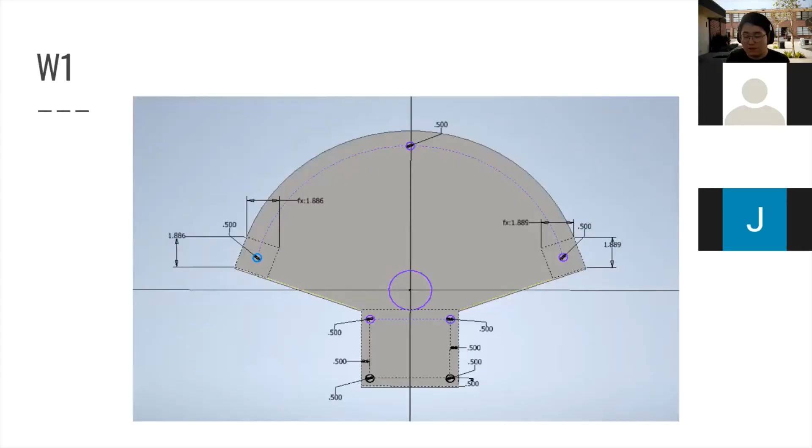So if you're wondering what this is, it's just going to be holes cut in, kind of like skeletonized, basically the structure. Now these ones cost me quite a lot of time to CAD, but these are stoppers.

This was a specific request from one of our other doctors who specifically wanted to say that some patients, their hand wants to be locked in at a place. Like right now, our device can move the wrist like that, but some doctors want it where it can go to this position and stay there for like 30 seconds or maybe a minute, however long the patient needs. So that's kind of like a stopping mechanism.

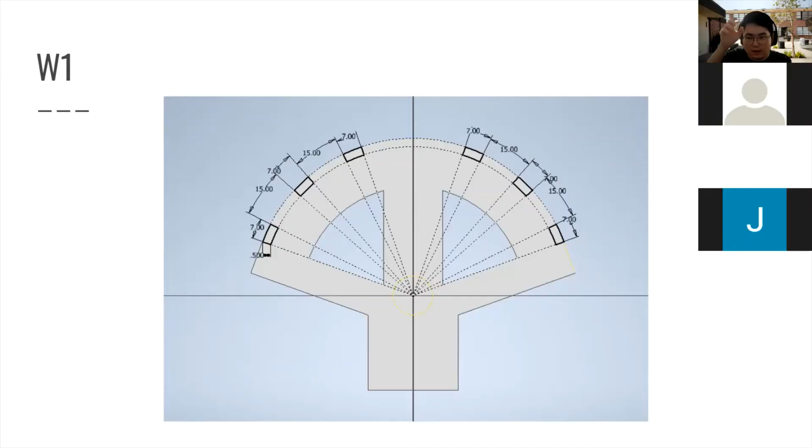And when I contacted Leaders Rehab Robots, they said they're going to come up with like a little dial, as to say, that goes with regulations. So you don't have to worry about the mechanism that puts it into place, but you will have to CAD little holes outside. So as I showed you before, this is going to be the final model/revision for wrist 1. Do any of you guys have any questions with wrist 1?

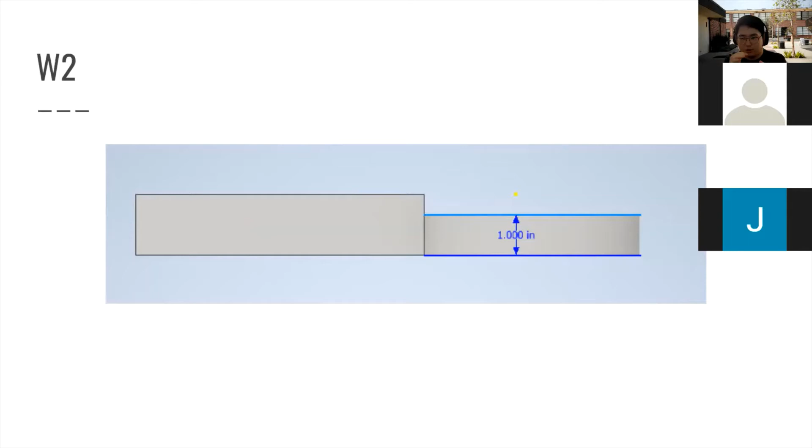Wrist 2, you just have to reduce it by 1 inch. Again, with the whole being efficient, our mentors don't need all that space, so we're just going to shift it up by 1 inch. No big deal, just get it done quickly.

Wrist 4, Michael. We might have to get rid of the whole adjustable settings because our mentor said that's too much space that we need. Like if we make it adjustable, it'll be too wide and it's going to be hard for transportation. So you just have to cut off the little parts there. No need.

I also put specific measurements for how it should be. You see those on the annotated blueprint, I put measurements and everything. So right now the dimensions for the overall plate is fine, but we do have to remove the adjustable factor because it's kind of like a balance between feature and weight.

They don't need all that space in the first place, and they don't really want the patients to have to fiddle with it, because if the patient is unable to secure it properly, then it might be a problem, and we can't always expect them to adjust it properly.

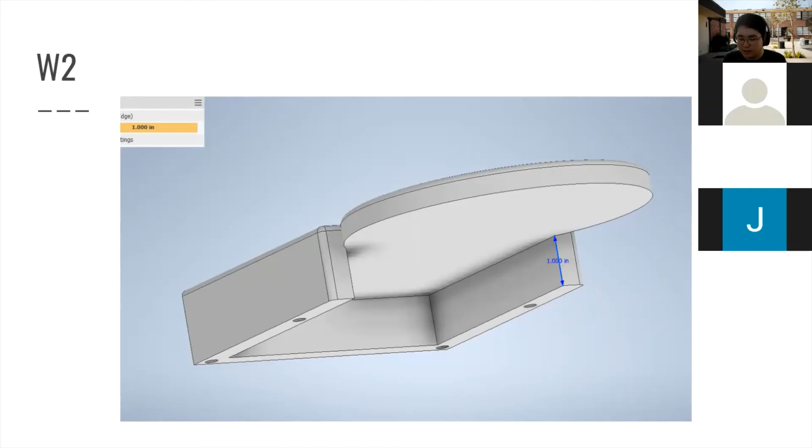Our mentors actually proposed that we keep the friction pad or something like that, the one made out of rubber. They're going to coat the entire thing with it. Each part where it makes contact with the arm, they're going to coat it entirely in this black layer, kind of rubbery, like the stuff you find on workout benches.

Alright, so F1. Now I'll let you guys know what's happening with F1.

F1 has always been a little bit of trouble because that's the part where Dr. Kova gave us a suggestion, and she was focused on F1 as well, thinking, if a patient's hand is shut closed, how is he going to apply the device? How is he going to put his hand in it so it fits? So what I did was give it a pointy shape.

This is just some liquid container, but basically, if a patient's hand is shut, because there's a wedge over here, the patient's hand can basically slide right in like that. You guys kind of get what I'm trying to say?

Here's just a canned soda. The patient really can't grasp onto it if he can't open his hand. He needs to open it. So what we're going to do is have a little rounded edge that acts as a wedge for the actual fingers to open. Just kind of letting you know.

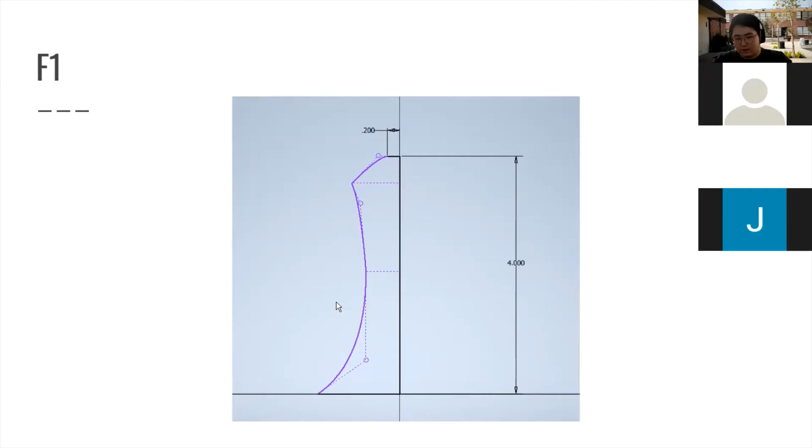And of course, we can't make it too bulky. So this is a more comfortable shape that I thought of, where you can just grab onto it and it'll be a little bit easier to use.

There's a specific part in your wrist that doesn't exactly work. It's one of the complicated parts of our wrist, especially because our wrist is a very complicated anatomical structure. This is one of the things Dr. Kova recommended, where it needs to be a little bit slanted because it's easier for them to grasp it. It's hard to explain because I don't have the exact medical knowledge to know which bone or joint is causing this.

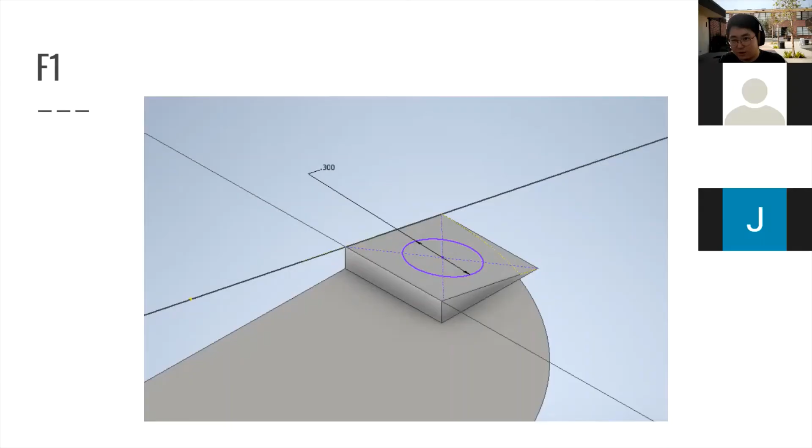But this was just a recommendation from a medical professional, that it's a little bit more comfortable to patients to have it slanted. So this little slant is basically accounting for that. We're going to drill a hole in there, there's going to be a rod, and it's just going to be a slanted surface.

And with F1, I kind of got rid of the pin because we didn't have enough space. I don't know if you guys know this, but that's 0.3 inches, if you have your ruler with you. That's actually very short, and we don't want our mentors to drill holes that are surgically small, because then it's going to halt production, and we exactly don't want that.

So just know that we're going to have to take into account actual real life variables, because here's the thing: again, our mentor is actually going to help us build this thing. It's actually going to be 100% built within a couple of months, and a patient who volunteered and a doctor who volunteered may actually use it or try it once or twice.

Back then, when we were 3D modeling, we could make all sorts of holes, all sorts of measurements, all sorts of things. But right now, we need to account for the realistic structure of our 3D models, especially like this hole over here. We could make an entire hole and a pin and make it 0.1 inches, but if you guys have a ruler with you, 0.1 inches is like not even the size of my fingernail. It's very, very small, like a surgically small measurement.

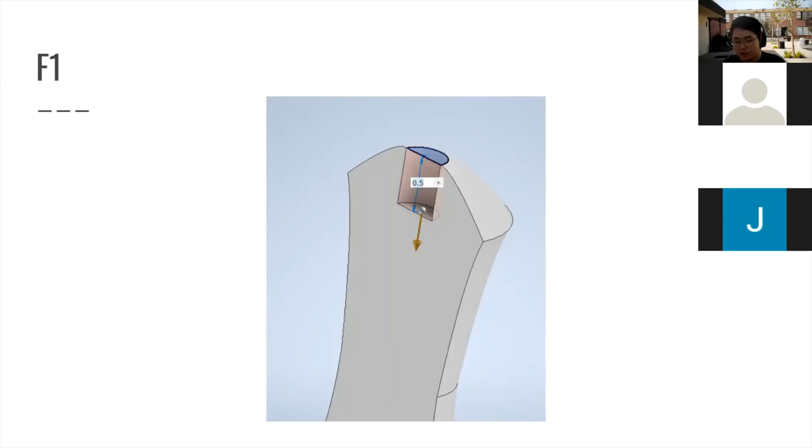So this is what it's going to look like. I know it looks very weird, but essentially, patients are going to have to use the wedge as a way to open it, and they're going to grasp onto it. Now this design can be so malleable. It really doesn't matter at the end of the day.

Let's say we're unsatisfied with this design, well all you can do is just 3D print or maybe get some plastic and make this a little bit thicker than it has to. Or you could try foam padding or silicone padding. It's really simple. So for F1, I'm going to assign someone to specifically edit it.

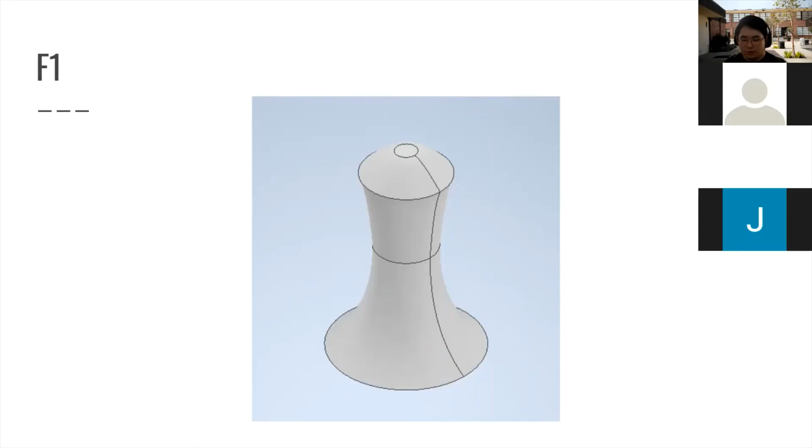So whoever is going to tackle that challenge, please don't think you have to do everything precisely, especially F1. It's such a volatile piece that can change, so don't worry too much about that.

Now for F3, before I go to F3, I got to make a quick announcement. F2 was scrapped. Our mentors didn't like it at all. They said it's a little too complicated, and the mentors are going to take care of the safety mechanisms themselves, so don't worry too much about it.

They don't want high school kids to focus on what's safe and what's not safe, because at the end of the day, we really don't have an educational basis on medical safety and things like that. So they said don't worry about it, we got that covered. So for F2, we're not going to do it because it was strictly a piece meant on keeping the hand from falling, but they have a different idea.

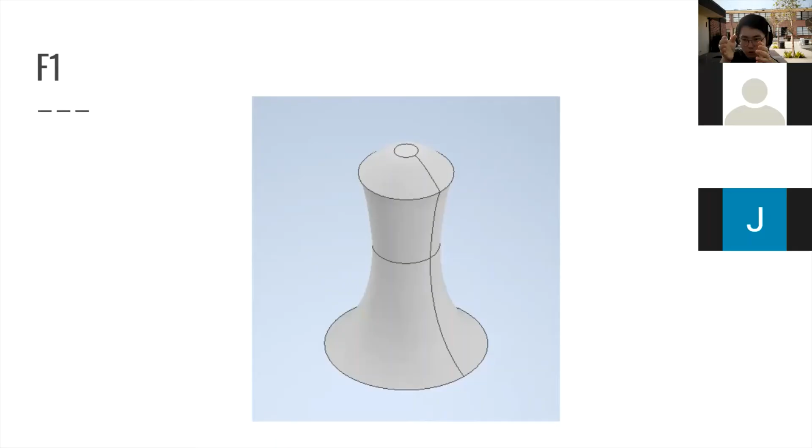They're thinking of putting pads just connected to F1, so they'll probably connect something to this base where it's kind of like a basket, where the basket holds the hands in. So that's why F2 had to be scrapped, and it's a pretty good thing, because as students, safety mechanisms and little minute details like that are a little bit hard for us to account for.

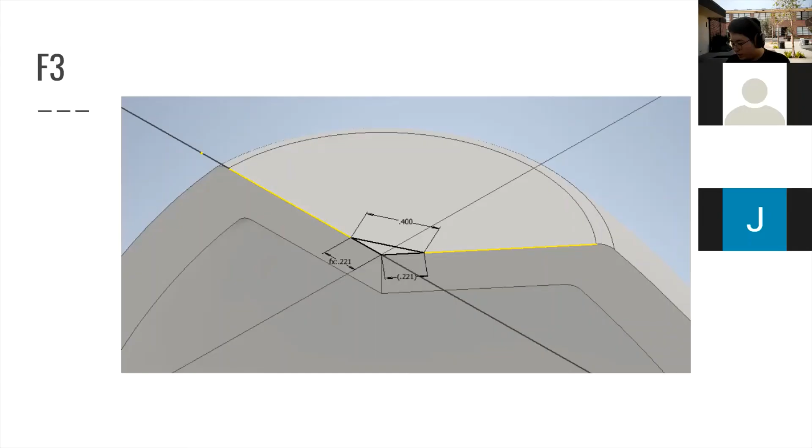So that's good. Now F3, you're going to have to take this triangle out. One key thing in Autodesk Inventor is that when you want to take something out, you could draw a huge shape and just extrude it in a negative direction. So let's say you wanted to take out...

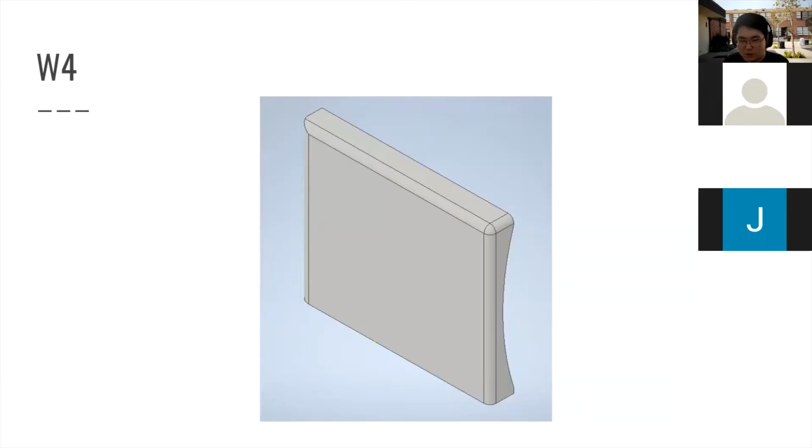Let's say for wrist 4, there used to be a complicated structure connected to it, but what I did was I just drew a giant square and extruded everything beyond. I'll go over this more precisely tomorrow, but what I'm trying to say is these edits really aren't that hard. Some of these edits are going to be hard, like Lyndon's. Your wrist 1 is going to be a big deal. Junso is going to help you with it, but for everyone else, it should be a little bit easy.

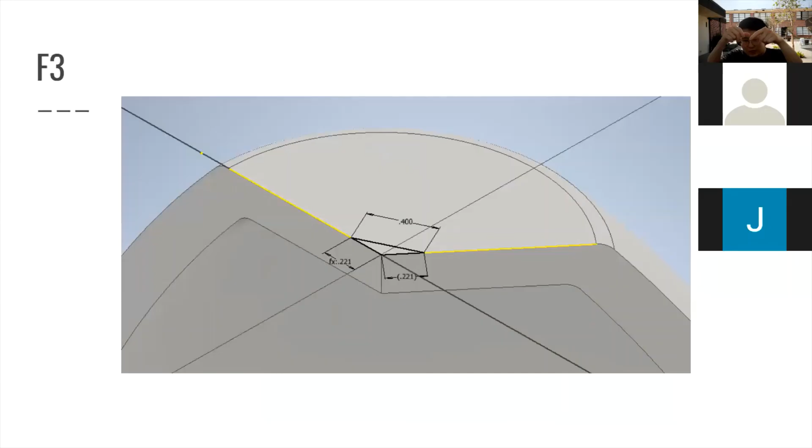So you're going to draw that little triangle and you're going to extract it, cut it basically like that. And you're just going to have to extract a semicircle that's 0.5 inches long.

Now, here's what the complete assembly looks like. This is a very template model. I rushed this last night, so don't think everything's done, because it definitely is not. These are very basic models, and last night when I was doing them, the constraints weren't even working - the 3D model just wasn't moving at all. That's a sign of rushing. Whenever you rush a 3D model, it's not going to fit perfectly, and it's going to give you a lot of errors because computers are very specific.

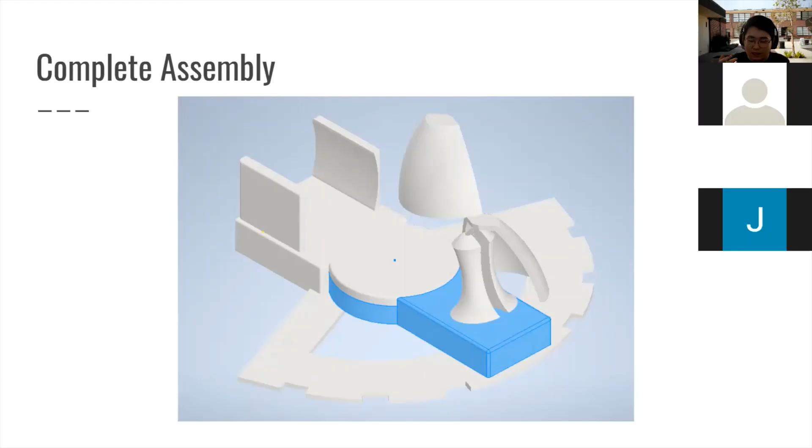So we have a target model, but don't think that we're done, because we have this rough structure. This is a very, very rough structure. If you see the edges here, I didn't even fillet them, it's really rough basically. So know that there is help if you want to look at this, but please don't think that we're done.

That's how it looks like from the back. The patients are going to put their hand in from here, grasp onto that, and that thing's going to open, and that's going to facilitate motion. It's just like a quick drawing from the front. I didn't put the left cap here just to show you guys how the device actually looks like.

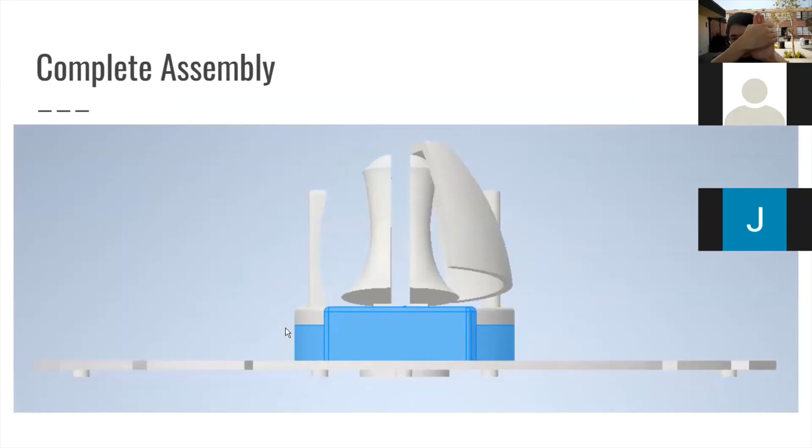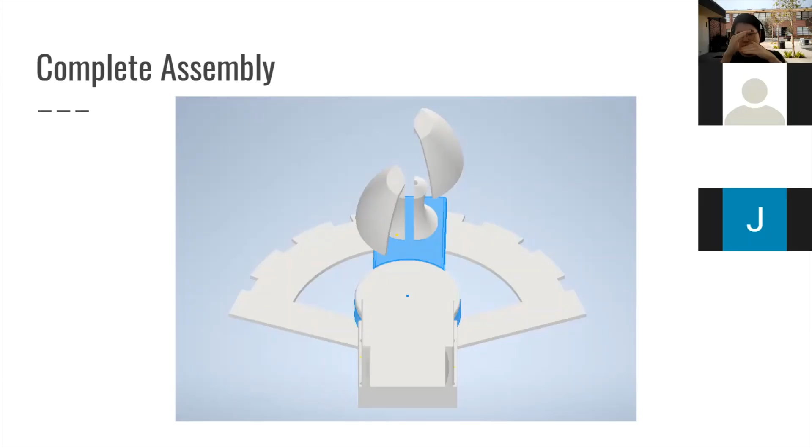Remember when I said it had to be tilted at an angle? If you see this blue part here, that's what it is. You're not just grabbing onto it - it's going to be a little bit tilted, so that patients can actually just grab onto it, and it's going to spread a little bit more wider. One of the concerns Dr. Kim had was that it might not open up fully, and that's why he suggested the little angle of rotation when it's actually rotating.

You can, right now today, edit your 3D models if you're confident enough. But for people who are wondering about the specifics of editing each part, I know you guys are having difficulty - like how do I do all this, is there a specific mechanism? Alrighty, take care. But if you guys are wondering about the specifics on how to edit all these parts, that's what we're going to tackle tomorrow.

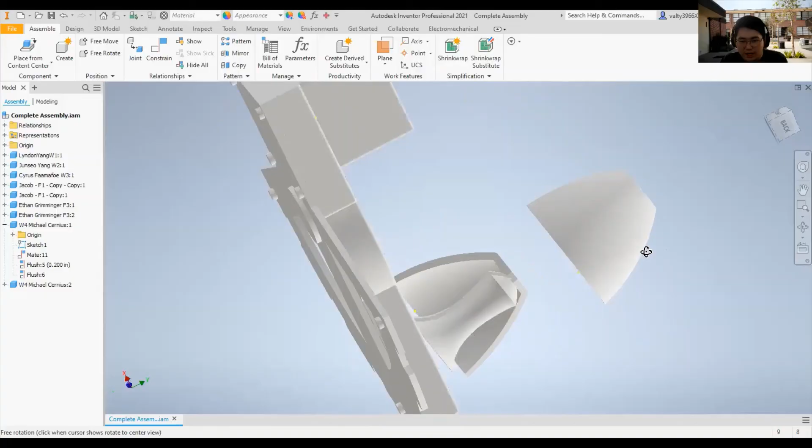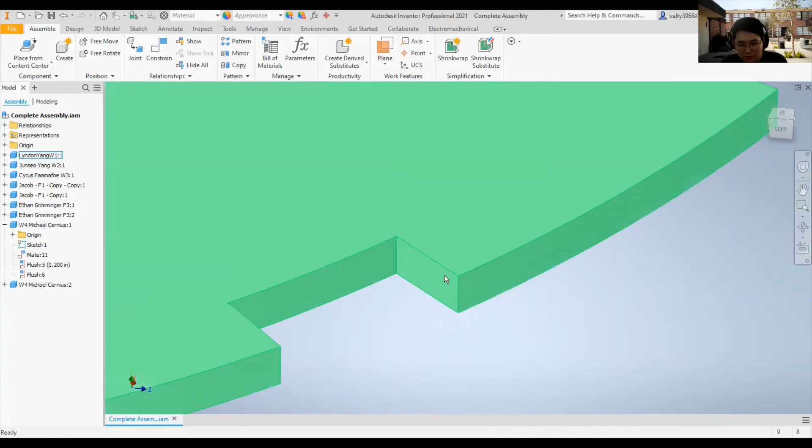Now, before you guys go, here's an actual model. I hope you guys can see my screen. Yeah, this is basically the end goal. But you see how all of these structures are kind of crude, like there isn't a hole there, these aren't properly filleted, and that's definitely not nice looking. Probably these little points, they shouldn't be there, should be rounded out. And design details here, like how it's not matching and all, little things like that, and how there aren't any screw holes - that's going to be what you guys are focusing on.

You guys are going to do the general requirements. It's going to take you like 5 minutes to CAD, but the primary part is going to be actually editing your 3D models. So with that said, you guys are free to go. Tomorrow, 7 p.m., just know that.

Junseo, are you available tomorrow at 7? For school? No, tomorrow. Before school or after school? I mean, not school, sorry, morning or afternoon? Afternoon. Yeah, I am. Okay, so I know you missed this meeting, but it's fine. I'm going to go into everything in specifics tomorrow, so don't worry too much about it. Just try to make it into tomorrow's meeting at 7 p.m., okay?